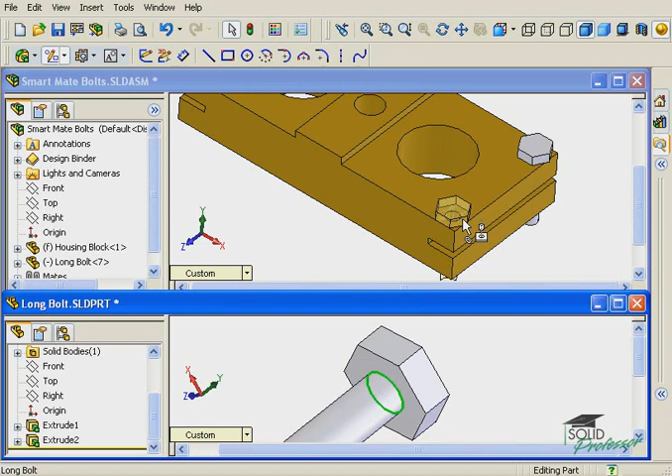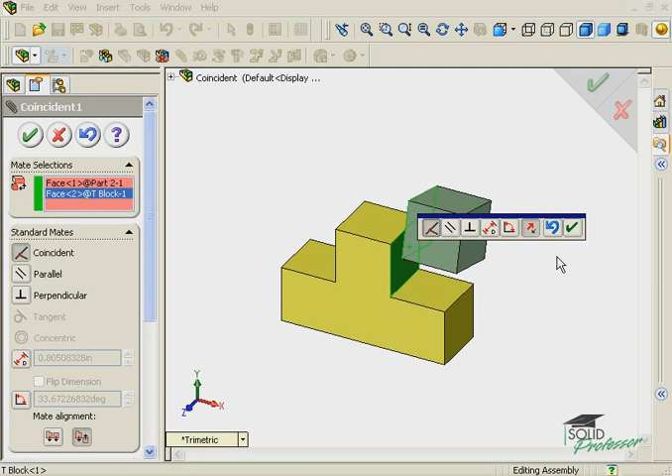Smart Mates can also be used a little differently within an assembly with existing parts. Let's take a look at an example to clarify. Using a traditional coincident mate as an example: previously, you would have selected the mate icon, then selected two faces of the parts to mate, then selected the mate type of coincident. Using Smart Mates, this process becomes much quicker.

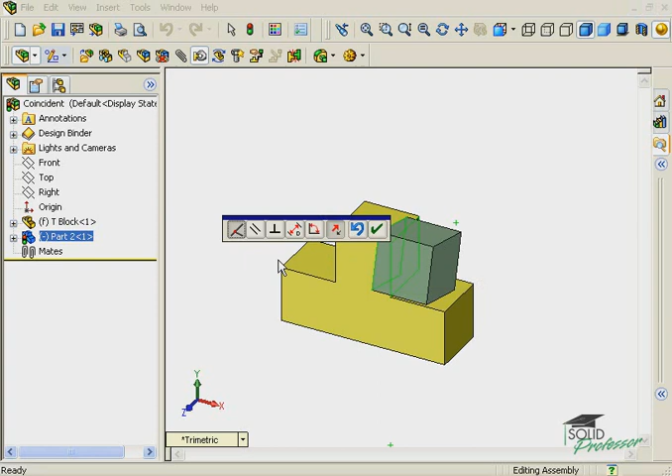To add a Smart Mate, simply press and hold the Alt key on your keyboard, and then click the entity you want to mate, this face. Then, with your mouse button still pressed, simply drag your cursor over to the other face you would like to create the coincident mate with. Then release the mouse button and the Alt key. Next, the Mate pop-up toolbar appears, and you can select the type of mate you would like from the toolbar.

Let me undo this and repeat this process one more time, this time creating a coincident mate between 2 points. I hold down my Alt key and click on my first entity to be mated. Notice after I click the point with my Alt key held down, the part I selected becomes transparent and the paperclip icon appears next to my cursor. These are visual indicators that a Smart Mate has been activated.

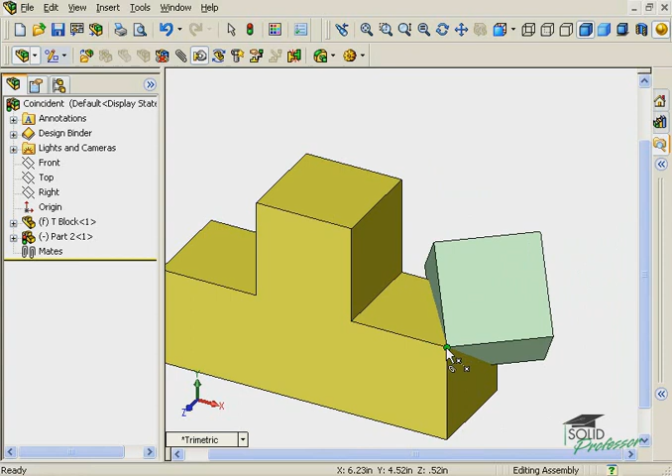Next, with the mouse button still depressed, move the cursor over the other item to be mated, and the Mate pop-up toolbar appears to complete the mate. Notice this time, I only have 2 options available in the Mate pop-up toolbar. This is because there are only 2 types of possible mates between 2 points, coincident or distance.

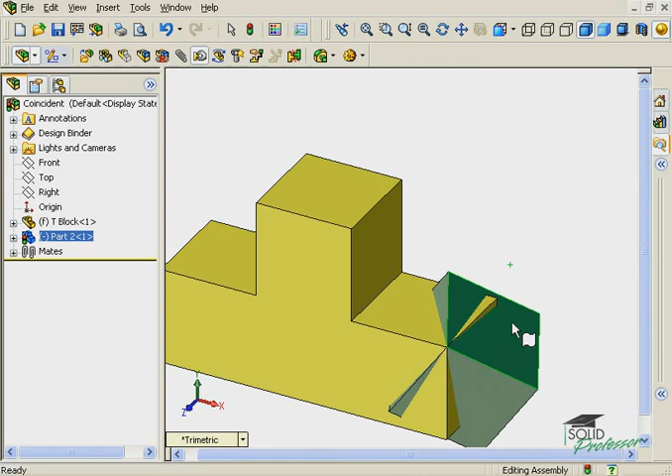I recommend spending some time using Smart Mates to mate different types of entities together, such as faces and points, lines, edges, etc., to become familiar with the types of mates that can be quickly created using Smart Mates. Once you become comfortable using Smart Mates, you'll notice your assemblies coming together much quicker.